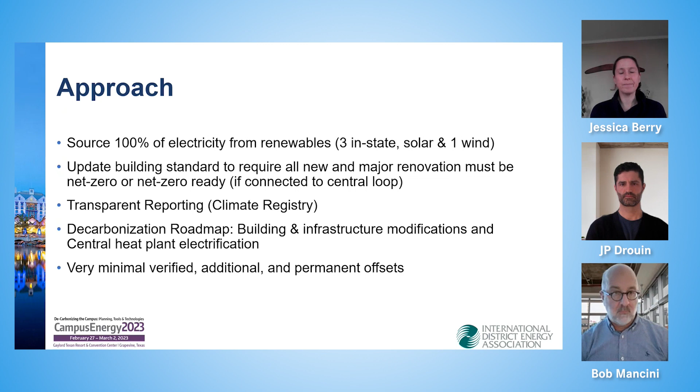So now I'm going to turn it over to JP, who's going to talk a little bit about the thermal efficiency project. As I had mentioned, the thermal efficiency project was underway before we had decided what our new goals were going to be. And it became clear very quickly once we did identify our new goals that the thermal efficiency project would or could enable future electrification and decarbonization of campus.

And so we worked very closely with Ecosystem during this process, or during the work for the thermal efficiency project, to be flexible and modify as needed the approach to the thermal efficiency project to think about how this could enable our new long-term goals for decarbonization.

So JP? Thank you, Jessica. Thank you, Bob. So I'll provide a little bit of additional information on the thermal efficiency project, and then we'll move to the next part, which is the more recent refresh of the roadmap for Brown.

So, like Jessica said, the thermal efficiency project was undertaken before the full roadmap was fully developed for the university, and it was really targeted to reduce temperatures of the main thermal system at Brown, which consisted of a mix of high pressure steam, high pressure and high temperature hot water, and then low pressure steam, smaller hubs all around campus. And it generated water and energy savings and helped reduce the operating costs.

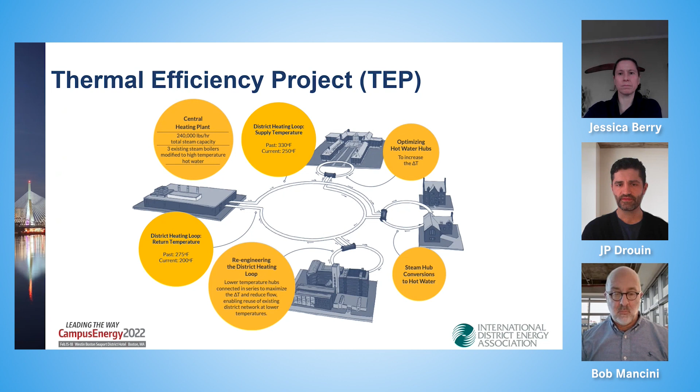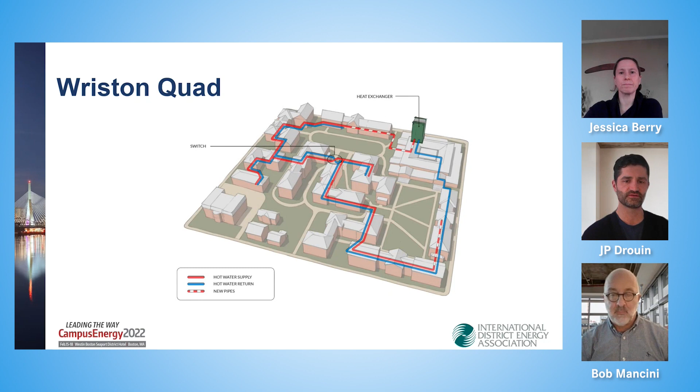So you see that the full lines are reused piping, and the dotted lines are new pipes that had to be installed. So that gives a sense for that part of the campus how much assets we were able to reuse, and that contributed a lot to the favorable economics of that project. Next slide, please.

Just quickly to add on the delivery method, having an integrated engineering and construction way to deliver the project with guaranteed outcomes was very important as far as making sure the results were there for the money spent and holding one company accountable for those results. So that's something that Brown has been doing for years. It's what we've been doing for years. It's one of the key synergies between our two groups. And so fortunately, they understand that method of project delivery, and that's what they use on campus. So that was something that worked to our collective advantage as well. Next slide.

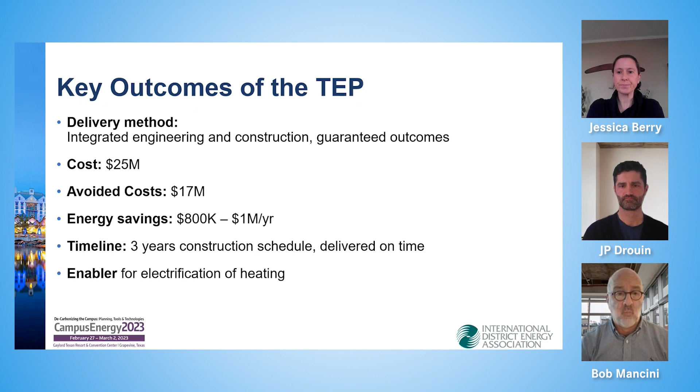So now this is like the second part now, post 2020. We'll get into the refresh. We have the TEP, which set us up for the refresh post 2020. So I'll hand over the next slide to Jess to talk about that.

Great, thanks, Bob. You're welcome.

So as I mentioned, the decarbonization, electrification part of our approach is really the most complex and transformative campus project that we've undertaken. This kind of touches every piece of campus. It's about 240 buildings, some which are quite large, and then some which are quite small.

And so this really required us to have a wide expanse, a wide breadth of knowledge, have really experts in the room on all sorts of topics. And what we landed on was working with three different engineering firms, all that had experience and expertise in different ways. But it started to build this brain trust around this project. And so obviously Ecosystem was one of these firms. They had been with us with the TEP and for other projects.

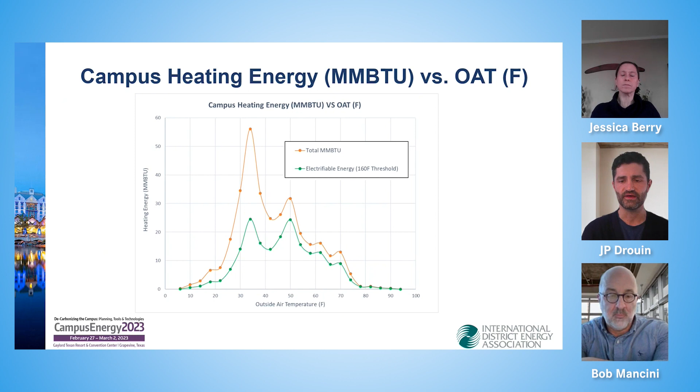And so the orange line is the total, and the green line is what would it be possible to electrify and decarbonize if we had ways to generate heat at 160 Fahrenheit. So that gave us a first impression of, okay, we would be able to, let's say, generate half of the heat, or a little bit more than half of the total heat with water at 160 Fahrenheit, but there's still a lot that's out of reach, that's at higher temperatures. Next slide, please.

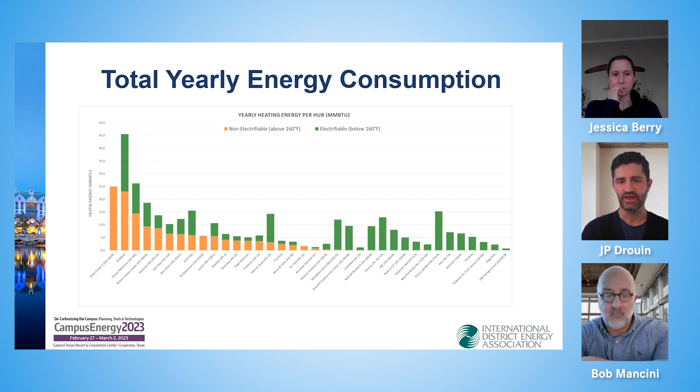So that's another graph showing the same data, but per building now. So we see for each building, if we were able to generate hot water at 160 Fahrenheit with heat pumps, what would be the fraction that is electrifiable? So the building loads that's below 160 in green, and the building heating loads that's above in orange. Next slide, please.

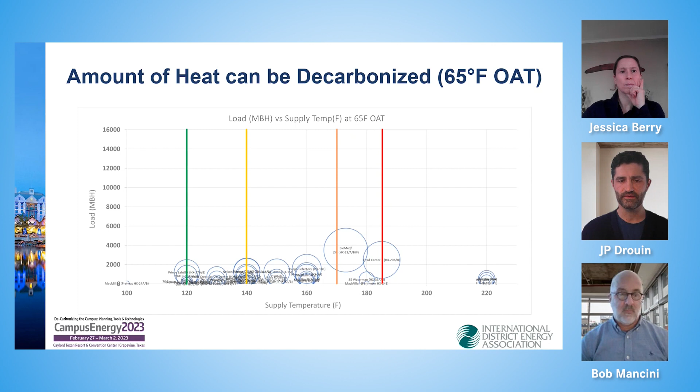Next slide, please. So that was the energy side, and now on the building side, through our knowledge of the buildings, we're able to develop rules of thumb for cost of conversion of a building, for radiant heating systems like radiators, perimeter heating units, cabinets, or fan coils, versus ventilation systems, so air preheating and terminal reheat. So we find by experience that the radiant side is more expensive to convert than the ventilation side.

And so for certain types of buildings, for instance, dormitories versus academic buildings, we're able to develop these equations that give us a sense of the cost to convert the buildings to various temperatures. So we'll have an increasing cost of building conversion for a greater reduction in temperature of the building heating system. So that's the idea. Next slide, please.

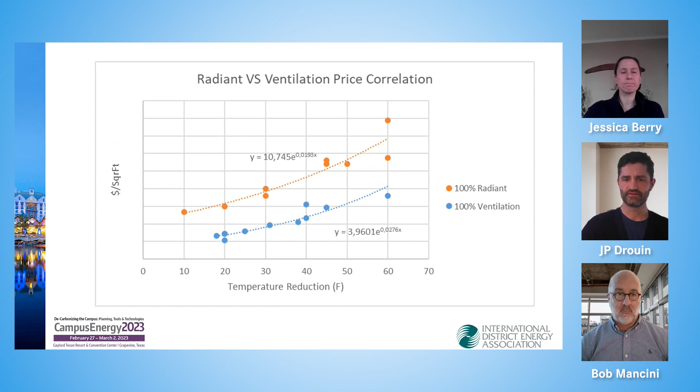So that in a nutshell summarizes some of the approach that we've taken as part of this exercise focusing on the buildings. And like I said, this is one component of a much larger problem, but we're making progress.

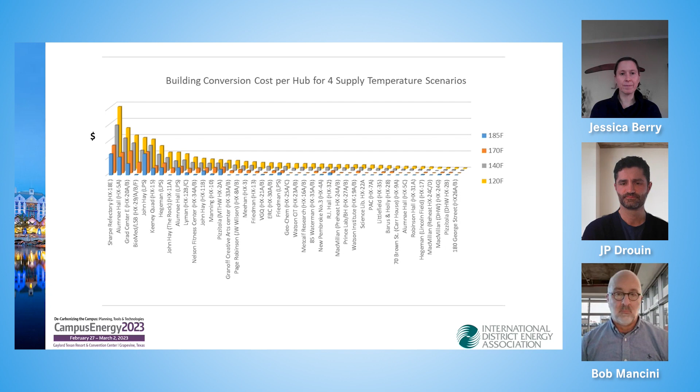Back to you, Bob and Jess. Thank you, JP. A lot of really good information there. Too much for the allotted time.

I'll summarize. Brown's journey, like most other campus journeys, is simple but not easy. This roadmap is a very iterative process, and what we find in all of the successful roadmaps or organizations who are achieving their decarbonization goals, there are really three ingredients to the recipe. The first one is strong internal and external collaboration. The second is a shared alignment across the internal stakeholder groups. And the third is strong partnerships that bring results-driven innovation for the design and the project delivery. So the next handful of lessons learned, I'm going to talk about just really briefly.

It was really important for Brown to engage with firms and people that we had long-term trusted partnerships with. A great example is Ecosystem. We had a great experience with Ecosystem in regard to the thermal efficiency project, as well as some other small projects on campus. So that trust had been built, and we felt comfortable engaging with them along with the other engineering firms for this really important undertaking that carries a lot of risk if we don't do it thoughtfully and carefully.